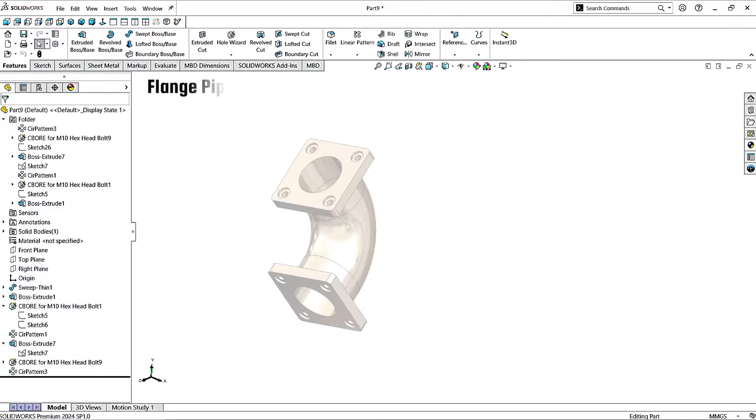In today's tutorial we are going to design a flange pipe elbow, using essential features and commands to bring our design to life. We'll also customize appearance to give our material a professional look. I hope you'll enjoy it. Now if you're ready, let's get started.

Go to the File menu. Click New. Click on Part and click OK. To increase the sketch resolution more better, go to the Options setting. Click Document Properties. Click on Image Quality. Increase the resolutions like this.

Click OK. Now go to the sketch. Click on Sketch. Choose the front plane.

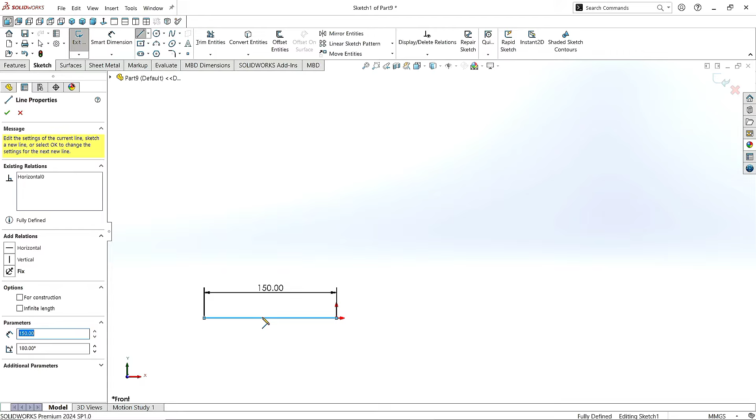Now take the Line command and draw a line of 150 mm. Take away the cursor and back to the starting point. It will make an arc.

Again draw a vertical line of 150 mm. Click Exit.

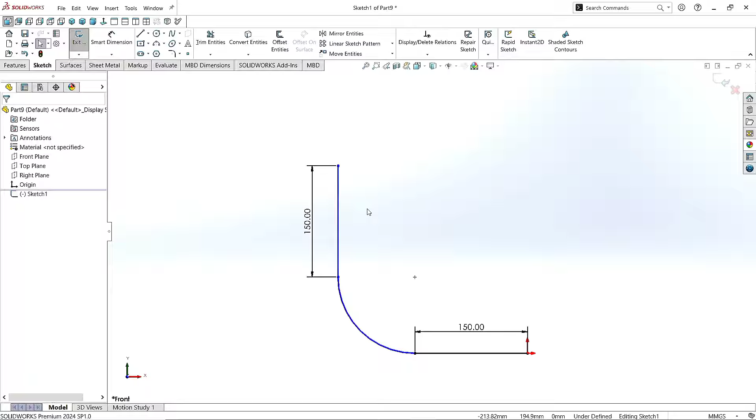Now take the Smart Dimension command and give the radius to this arc as 260 mm. Click OK. Again click here to finish the sketch.

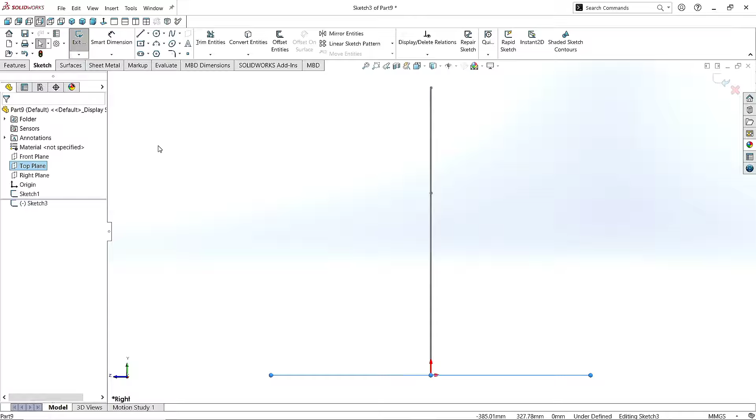Click on Right Plane. Take the Circle command and draw a 290 diameter circle here in the origin. Click OK. Rotate a little.

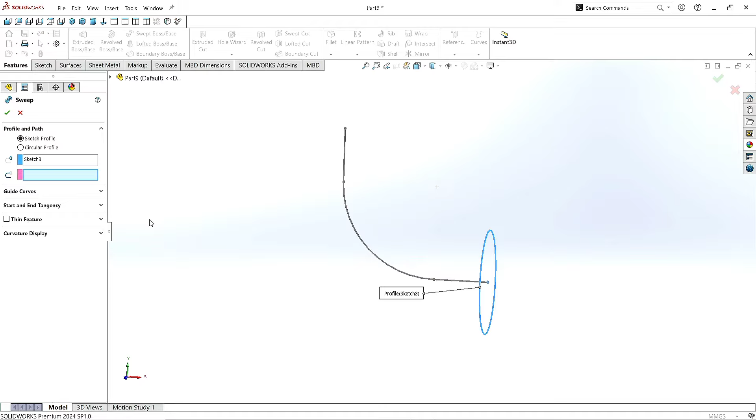Now go to the Features. Click on Swept Boss command. Sketch is already selected. Click here and choose this line as a path. Here we see, it's a solid object. To make it hollow, click here in Thin Feature.

Give the thickness value as 40 mm, click here to give the thickness inside. Click OK. Zoom out. Rotate a little like this. Click on this surface. Click Sketch.

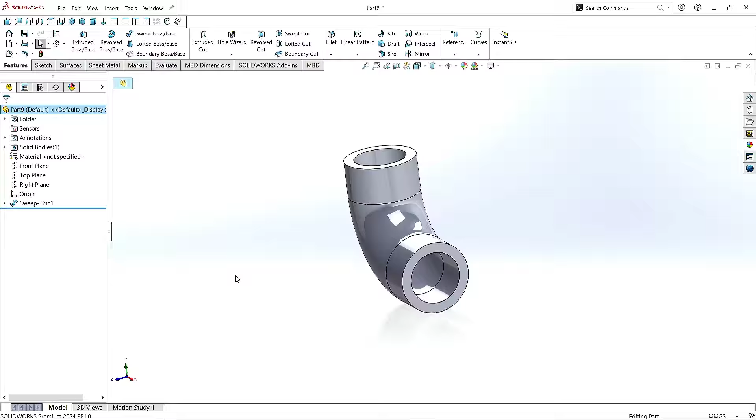Take the Center Rectangle command and draw a rectangle here in origin with 360 mm width and 360 mm length. Press Enter. Click OK.

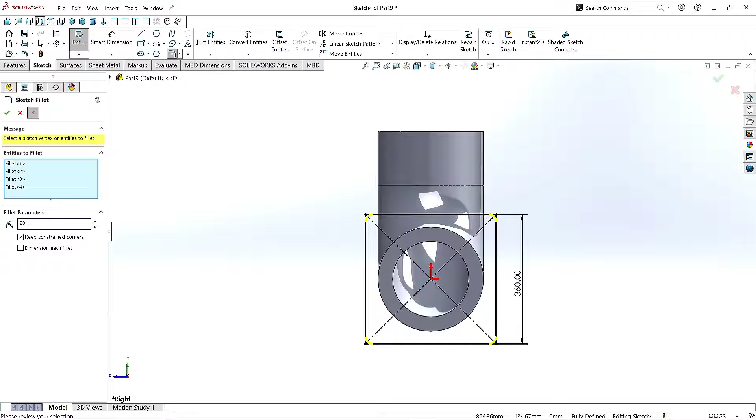Now take the Fillet command. Select the whole rectangle. Click Yes. Click Yes 3 more times to complete the command like this. Give the fillet radius as 20 mm. Click OK.

Again take Center Rectangle command and draw another rectangle with 260 mm width and 260 mm length. Press Enter. Click OK.

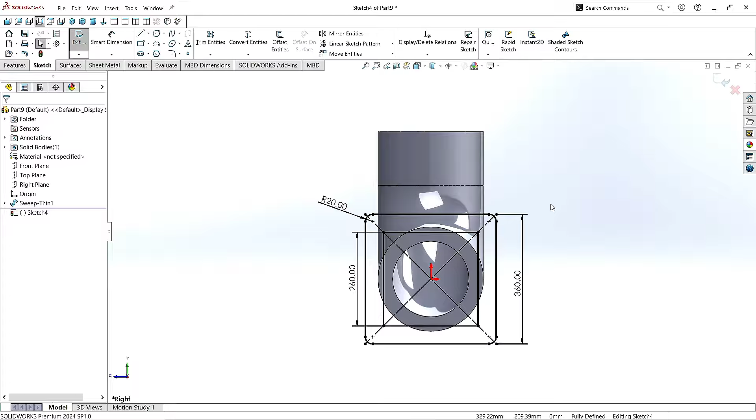Now select both the rectangles like this. Press Ctrl+C to copy it. Click OK. Rotate and zoom a little.

Go to the Features and click on Extruded Boss command. Click here and select this section. Also select other corners one by one like this.

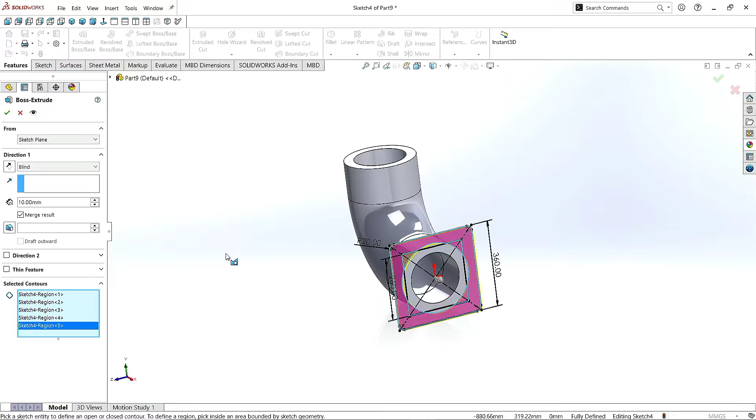Select here Blind. Give the extrusion value as 50 mm. Rotate and zoom a little. Click here for reverse direction. Click OK. It looks perfect.

Now click here. Click on Sketch 4. Click Show. Go to the Hole wizard. Click on Counterbore. Scroll down.

In Custom Sizing give the value of through hole as 30 mm diameter. Size of counterbore is 60 mm diameter. Depth of the counterbore is 10 mm.

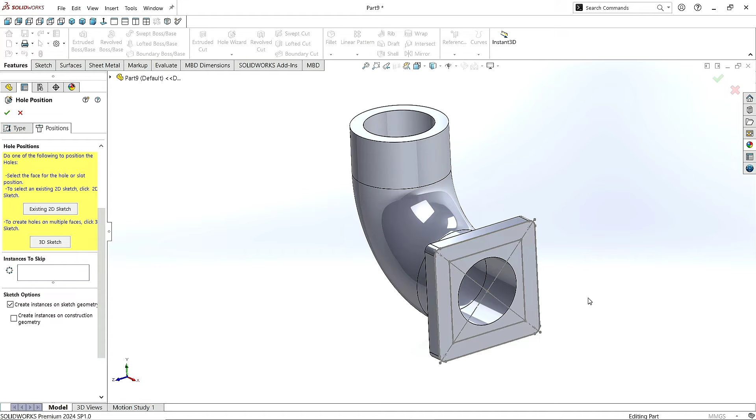Now click on Positions. Click on this face. Click on this point to make a counterbore. Click OK. Here we see it looks perfect and amazing.

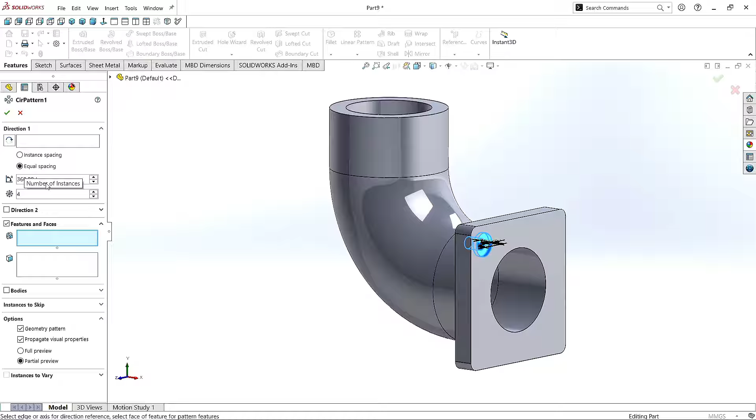Now click on Sketch. Click Hide. Select here counterbore and click here on Circular Pattern command. Give the pattern number as four at the angle 360 degrees. Click here and select this edge as reference of direction.

Click OK. Here we see it looks amazing. Now click on this surface.

Click Sketch. Select this edge. Click Convert Entities.

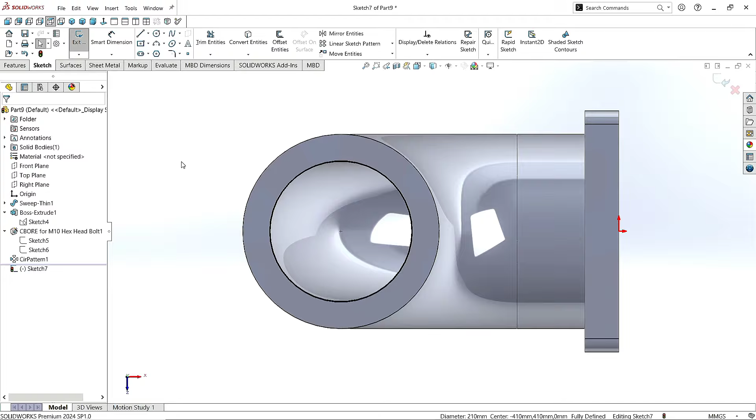Now press Ctrl+V. Here we have the rectangles we had copied before. Select the center point of the rectangle, hold Ctrl or Shift button and select the circle center point. Make them coincident. Click OK.

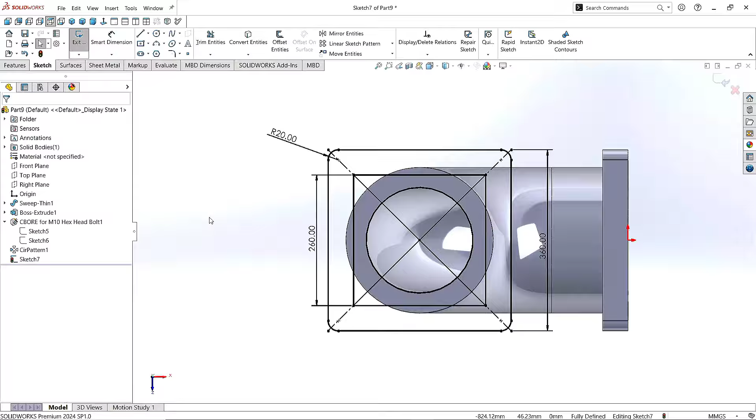Go to the background scene and select plain white. Now go to the features and click on Extruded Boss command.

Select here blind. Extrusion value is 50 mm. Click here and select this section and the other corners one by one like this.

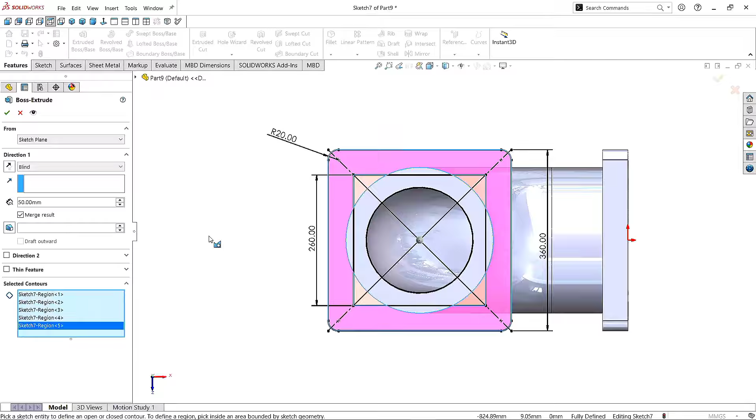Rotate a little. Click reverse direction. Click OK. Now click on this surface. Click Sketch.

Here click on Sketch. Click Show. Now click on Finish Sketch.

Go to the features and click on Hole Wizard. Click on Counterbore. All the dimensions and setting are the same. Just click on Positions. Click on this surface. Select this to make a counterbore here. Click OK.

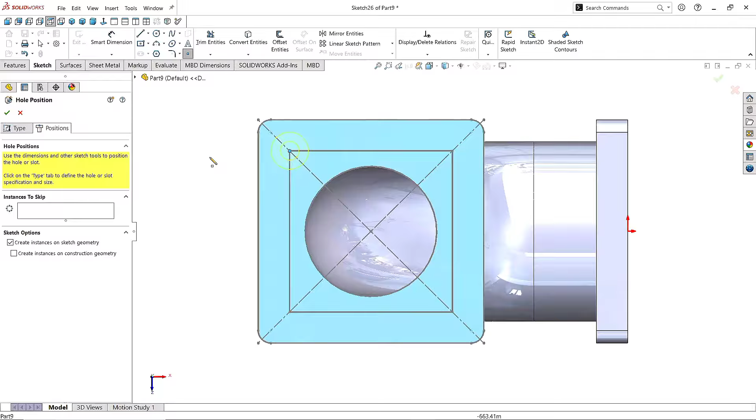Now go to the pattern and click on Circular Pattern command. Click here in Part Setting and choose Counterbore. Rotate. Click here and select this circular face as reference.

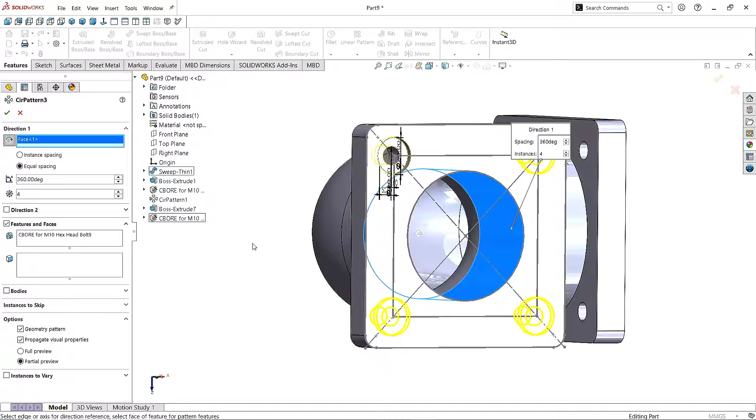Click OK. Zoom out. Click on this sketch. Click Hide. Click Isometric to make it normal.

Now go to the appearance. Click Metal. Click on Nickel. Select the brushed nickel. Here we see it looks perfect and amazing now.

Make it normal like this. Select this edge. Click Chamfer.

Also select this edge. Give the chamfer value as 10 mm, click OK.